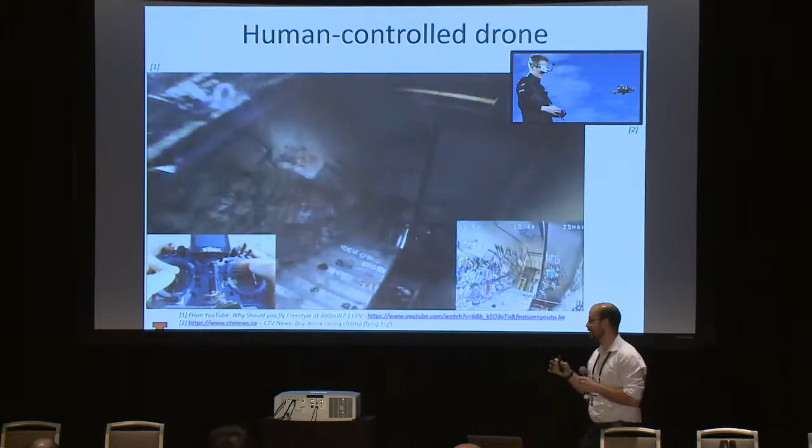In fact, humans are really good at controlling machines. This is a drone being teleoperated by a human, and you can see he's able to fly in this very complex scenario doing very dynamic maneuvers, probably at a bandwidth he's not even aware of. So the practice of the operator also plays a huge role in how well the system can be controlled.

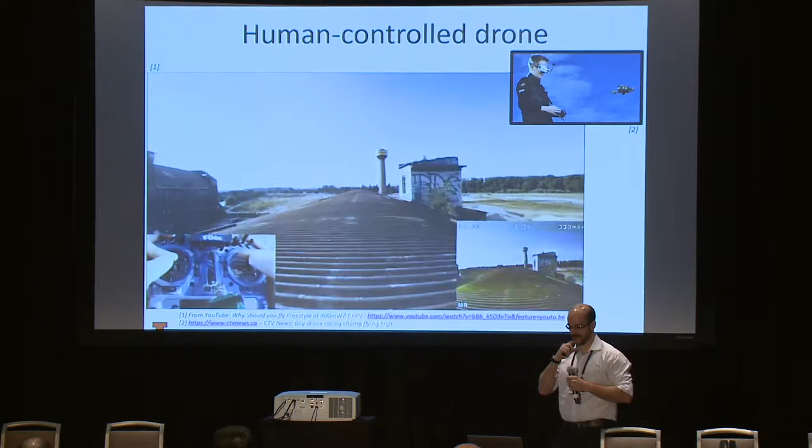Actually, this is one of my favorite parts. It's crazy what humans can do when they actually get to practice with the system.

So why don't we do the same thing with, for example, sending a robotic disaster responder? Well, there's a fundamental difference between flying a drone around and actually interacting with the environment. Let me give you an example.

Let's say you're a firefighter and you want to break down this door using an axe. You're not just going to swing your arms and hit it. The strategy involves your whole body, which plays a huge role in the force you're applying, but also the feedback from the environment. The feedback you get from doing this task is very important to do it right. If the door opens or if the door is locked, your reaction is going to be different.

And this isn't something only firefighters can do - everybody does this all the time. Take this little girl, for example, trying to open a door that's too heavy for her. What she does is actually go into this unstable condition and lean against the door so she can amplify the force she's able to exert and actually open the door and move through.

So I think there's something we're missing here when you try to do whole body teleoperation strategies. Let me try to convince you of my way of thinking about it.

I think it should begin the same way: we get a human operator being controlled by this sort of black box controller that we don't exactly know how it works, and you command the robot to move and exert some force on the environment. The environment responds to the robot with forces and other feedback, and something I think we're missing at the whole body level is: how do you close the gap? How do you give the human the feedback needed to really leverage human motor intelligence to control a robot that physically interacts with an environment?

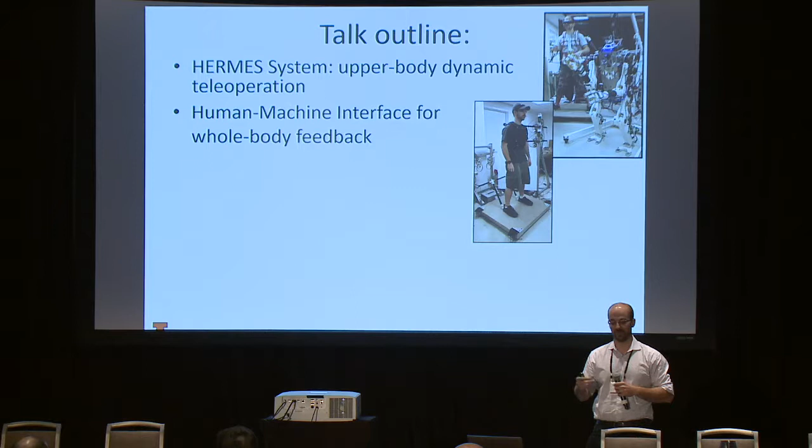I'm going to present the bilateral feedback strategy we developed for synchronizing locomotion, and how to control two systems using that - one a simplified cart pole, and the other the actual robot itself.

So let's get into the first one. Let's talk a little bit about the HERMES system.

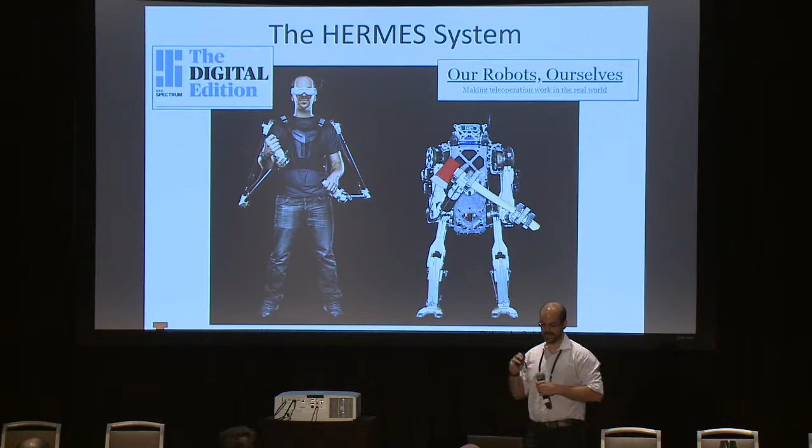So the HERMES system, it's a system that we developed back in 2014. And just now we managed to get this really cool picture from IEEE. They just released the article super late now about it, but it's still relevant. I still think that we did some really interesting things back then.

So in order to map the motion from human to robot, we did the simplest idea, right? So we did the very simple Cartesian mapping. The human Cartesian position of the arm would be mapped to the robot scaled by the arm length, and also the position of the body of the operator would be mapped to the robot to copy its posture, right? And you can see that the human operator will also wear that whole body feedback suit that later on I'm going to explain how it plays a role into the whole thing.

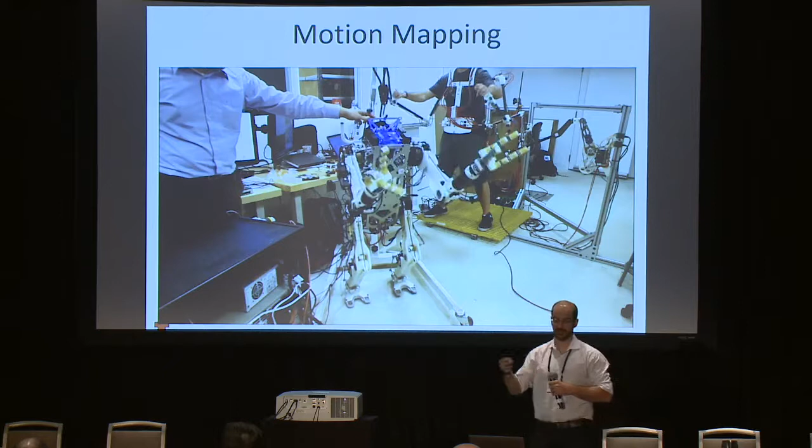And what is nice is that because it's a teleoperated system, there's a lot of stuff you get for free, right? So human dexterity, if you do it right, you can achieve these very interesting behaviors, which for an autonomous robot is incredibly difficult to do.

But also, we try to do some more interesting things. So we also use a robot to put out this mock-up fire just to sort of illustrate the potential of what we're trying to achieve. This was actually a demo that we did for a Robotics for Good video. But yeah, so it was just for shows.

But the robot itself, we never designed HERMES to work in this semi-static regime. So what we try to do is actually go into more dynamic situations. Probably some of you are familiar with this video. We try to actually teleoperate the robot, for example, to break through the drywall. And we're just trying to demonstrate that you also have to design your robot system correctly such that it's able to absorb these impacts and also produce large forces using whole body coordination, right?

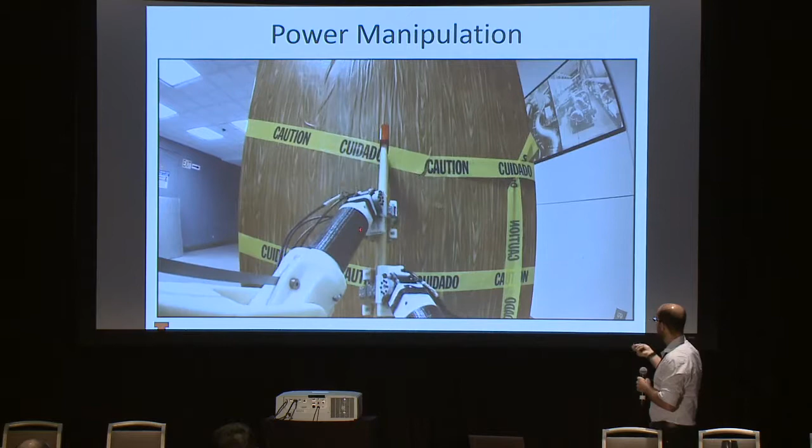So we learned that actually if you make the robot lean against a strike and just halfway through hit it, it would actually be way more effective. Because first we're just trying to blindly swing the arms and the robot would just be torqued back, right? And because you have the teleoperator there, we can just try all these things on the fly.

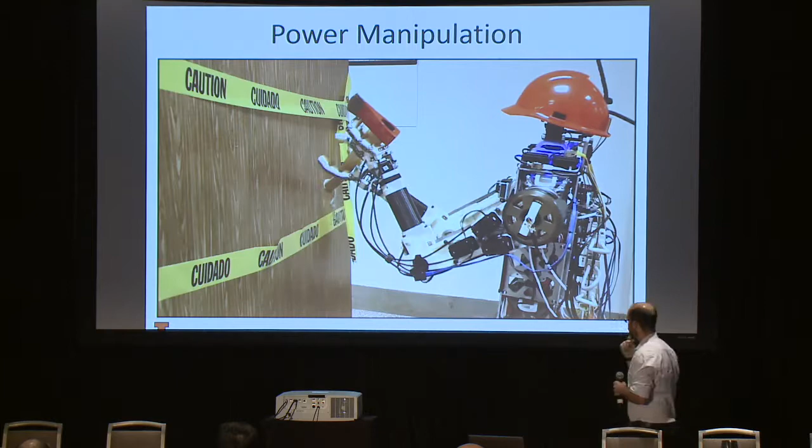Okay, so this is how we mapped human motion to the robot. So how did you close the feedback? Honestly, at the beginning, we had no idea how to do this. We didn't know exactly what sort of forces would be appropriate for the human to experience while the robot is doing its own activities.

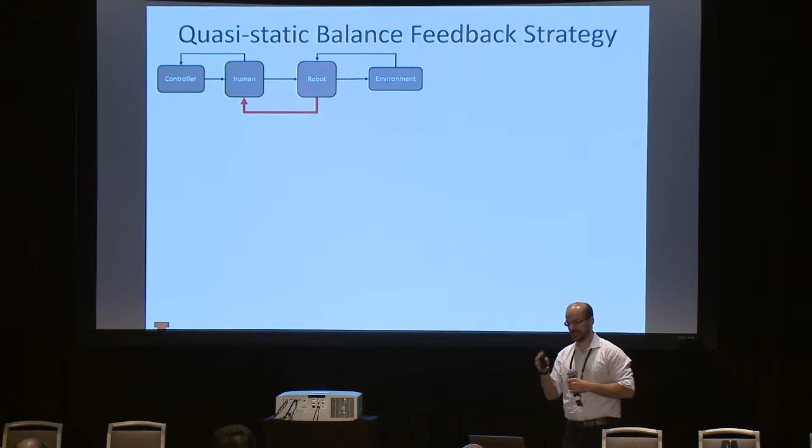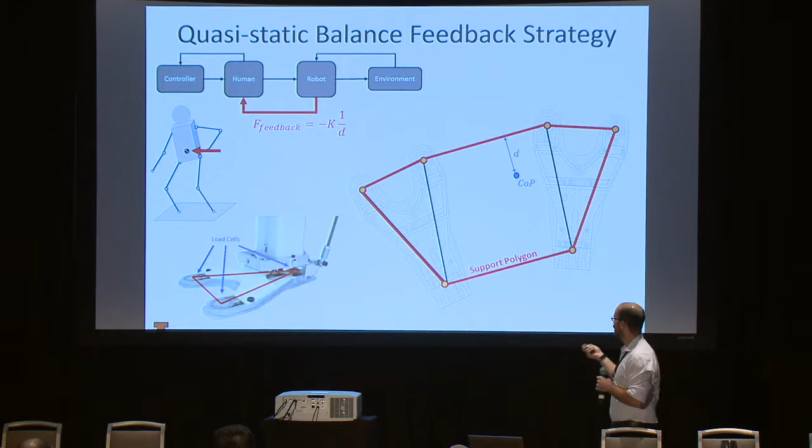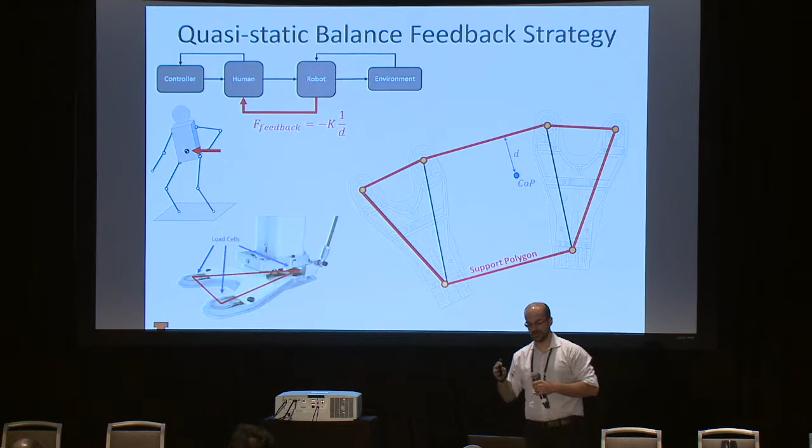So the first thing that we tried was very basic, was a quasi-static notion of stability. So we took the load cells on the robot, and if you project the support polygon, there's a point on the ground that's called the COP, right? I think most of you are familiar with this. So the first thing that we try is, okay, let's apply a force to the operator that is the inverse of that distance. The closest the COP is from the edge of support, the harder the force that you apply back, right? And I know this is a very naive approach, but it was the first idea, let's try to get a sense of what we can do with this.

And we got some interesting results. So for the robot, if the robot's standing there and the person is trying to maintain a posture, if the robot gets hit, then you can feel that. If the robot is trying to work with this sort of payload, then the operator can kind of come up with a different posture in order to regain balance of the robot. So this was all very interesting behaviors, but it was very basic, right?

It was definitely not a complete story. And there's something else that you need to do if you want to really go into a more interesting regime for these machines.

Okay, so we learned a lot of stuff. We learned how to teleoperate very fast motions, how to do large feedback forces, which is very complicated if you're trying to make a very transparent system, and also how to design these humanoid machines such that they could take these impacts to the environment and be robust enough to do that.

But if you're a humanoid and you're not attached to the world, then if you want to apply large forces to the environment, you also need to balance and regulate foot placement, right? So the feedback applied to the person needs to take into account some sort of locomotion dynamics as well.

So my research is about that. How do you build up all the strategies in order, for example, to come up with more interesting behaviors, such as taking steps, building up momentum, and then hitting the wall with the firefighter axe, which is sort of what we see the little girl doing.

She was sort of losing stability for a second in order to amplify the forces she was able to apply. And that's the sort of behavior I want to explore. I don't want to restrain the robot to be in a safe condition. I wanted to have an experienced operator be able to really understand how to control this machine and these added dynamics. Okay, but how do we do this?

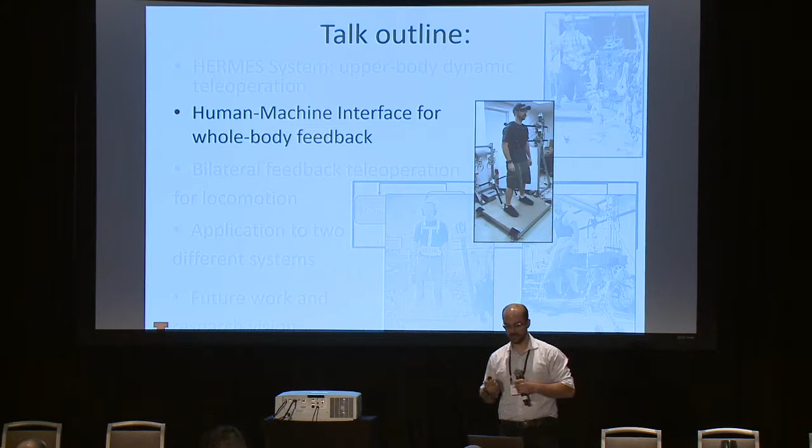So let me talk a little bit about the human-machine interface that we developed in the lab. This is called the BFI, the Balance Feedback Interface. It's an old name, we don't go by that anymore, but this is sort of the idea.

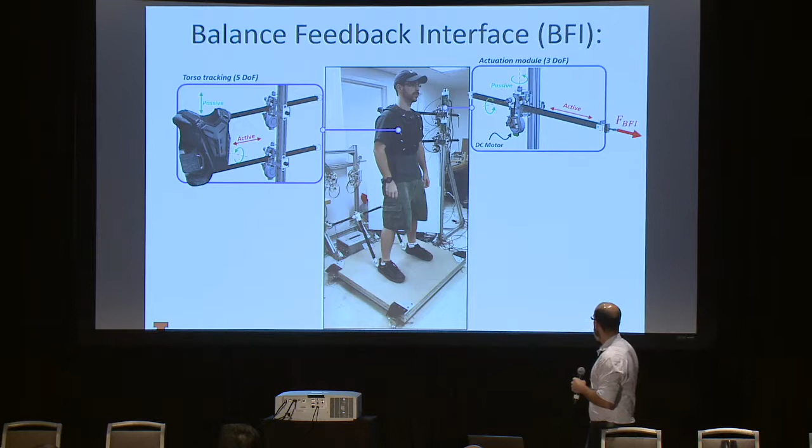The person wears this vest that is attached to a fixed frame using push and pull rods. These rods can apply a force on that line, so by modulating the force on the two rods, you can modulate the forces that the person feels, some sort of moment or linear force.

We track the foot position using this passive linkage system. We did this because we can really push the sampling rate of the system, getting something on the order of 10 kilohertz of sampling rate of the human position. We have a real-time computer that measures the whole thing.

And also the person is standing on this 6-axis force plate, which is going to be very important to understand the forces that a person is applying on the ground as he or she moves.

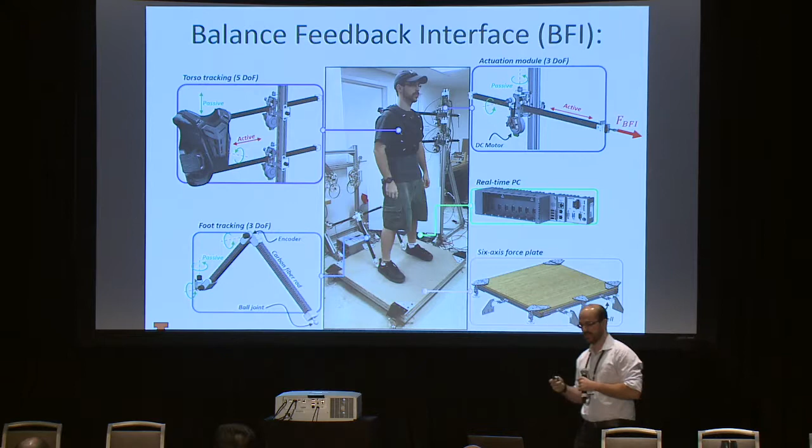But locomotion is a very complicated thing, I think all of us know that at this point. So let me show you how we break this down. This is a very basic motion: you have the operator here stepping side to side.

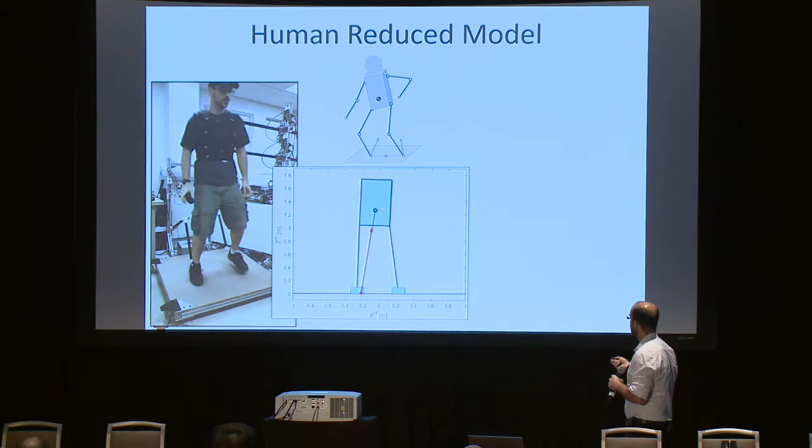What we do is just care about the core components of that locomotion. So if you take the position of the torso, which I assume to be the center of mass, position of the feet, and also position of the center of pressure and ground reaction forces, this is the kind of motion decomposition you get. That's actually the essence of locomotion: what is the interplay between your COP and the center of mass.

So that's what I want to transfer to the robot. I don't care what the rest of the system is doing. But in order to do this, my first approach is to start slow.

Let's try to reduce that to what most of you know as an inverted pendulum. If you isolate the center of mass and the COP, you get a system that looks like a pendulum, a very popular system called the linear inverted pendulum, which is incredibly powerful. You would be surprised. This is very important to understand the strategy behind what I'm trying to do.

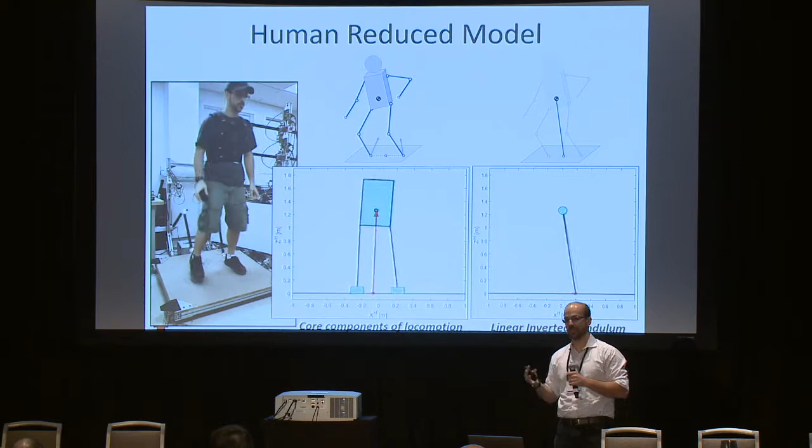So let me talk a little bit about the bilateral feedback strategy that I developed. This is the pendulum, the linear inverted pendulum equations. If you consider the height to be approximately constant, the natural frequency of the pendulum is sort of fixed, and you can write down an equation of motion.

It's something very simple—I think all of you are tired of hearing this. But what is interesting is that if you do the mode decomposition, you get a system that's first order that looks like that. And you got two states, actually.

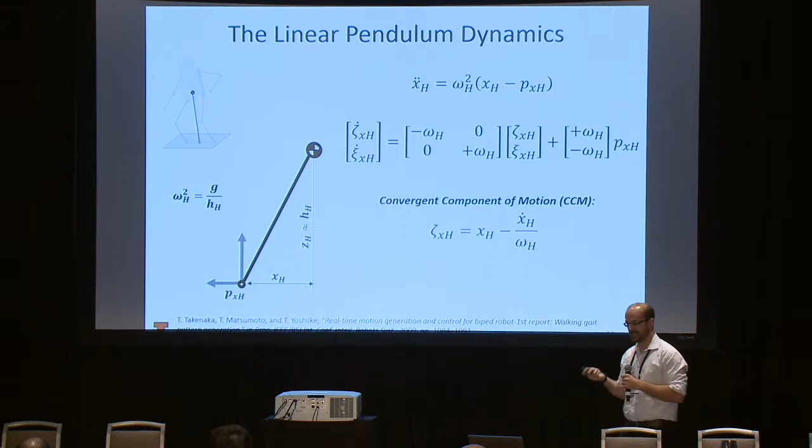One of them is a state associated with the stable pole. The stable pole, which is called the convergent component motion, looks like this—an augmented central mass state. The second one is a state associated with the unstable component of the system, called the divergent component motion, or capture point, or extrapolated central mass, among other names.

So the idea is that we assume the human is trying to control this unstable component, using the ground reaction force in order to do that. So if the robot follows what the human is doing with the unstable component, and follows a scaled version of the inputs, then they should move in a similar way.

So that's what I tried to do. And the DCM is just a projection forward of what the central mass is doing. So this is the key of what I'm doing—this is a very basic principle of what I'm trying to do.

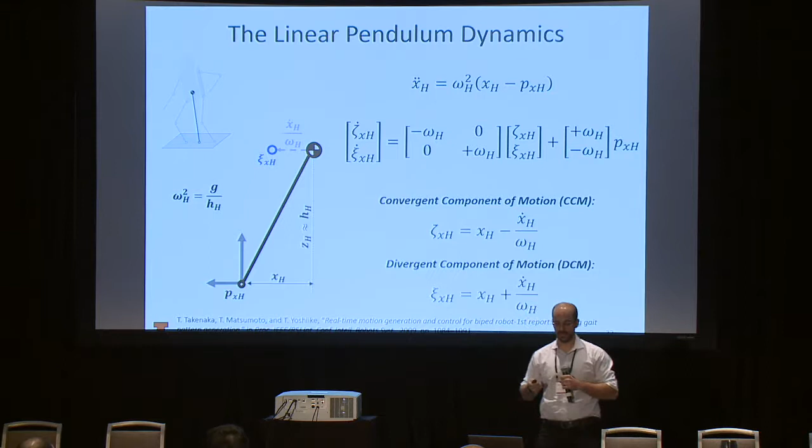So what we want is, if you have the human operator and the robot, both systems to follow a kinematically similar DCM trajectory. So if the human is able to stabilize its own DCM, the robot is going to do the same thing. And in order to achieve that, I'm going to use feedback to guarantee that the time rate of change of the DCM is the same, normalized by the natural frequency, because the pendulum relies a lot on its dynamics.

An interesting thing is that if you take this equation and plug in the equation of motion of the entire system, you get two terms. The first term says how you scale the human forces such that the robot applies them and can reproduce that DCM trajectory. The second term is what forces you should apply to the operator in order to make sure this is guaranteed at all times.

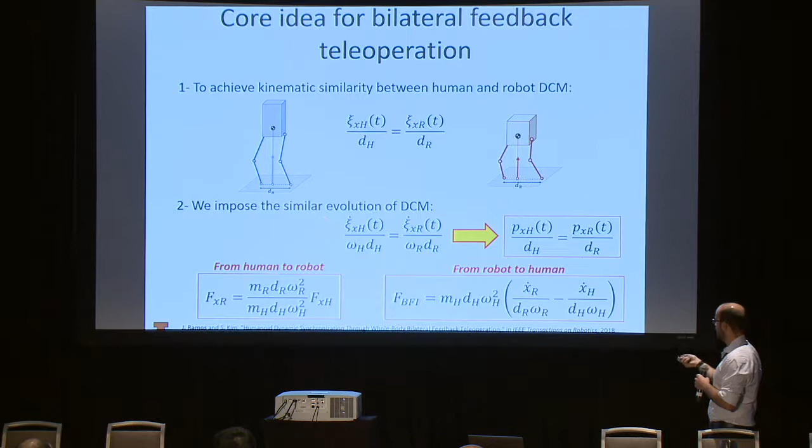So what I'm doing is actually using feedback in order to synchronize two systems that have different natural frequencies. The idea is very, very simple. And what is nice is you can show that if you have this, the two systems actually show the same relative position of the center of pressure, which is important because you want to be taking steps together. So the two systems become synchronized.

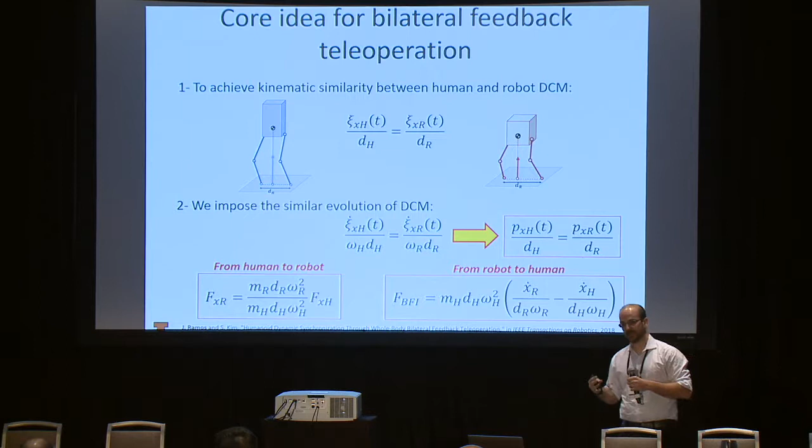So in order to demonstrate what I'm trying to do, I actually built the simplest system you can think of, which is the pendulum itself. So let me show you how to apply this to that simplified system.

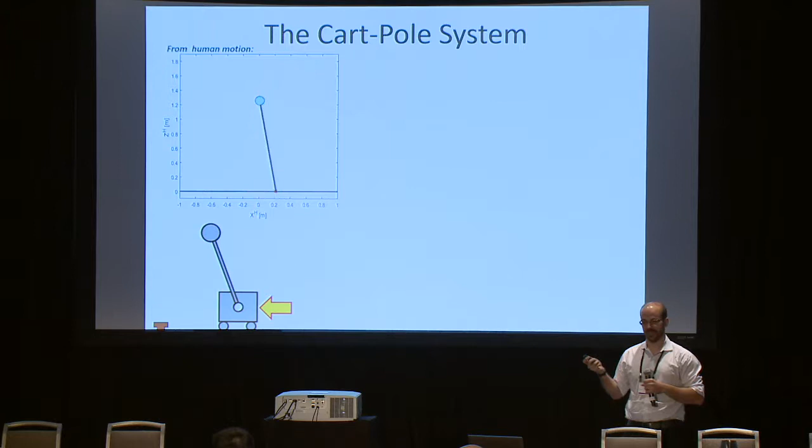So if you remember, the human motion when it takes steps looks a little bit like that—this is the central mass, that's the center of pressure. For those of you with a more controls-oriented background, this looks a lot like the cart-pole system. The cart-pole system is pretty much an inverted pendulum with a passive hinge on a rail, and the only thing you can do is place the position of this cart here, and in that way you balance the pendulum.

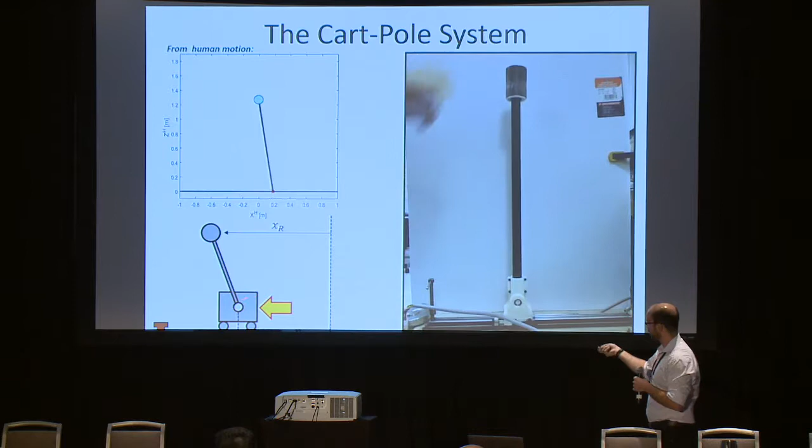So it's very similar to what I'm interpreting the human is trying to do when the person walks around and tries to manipulate the central mass. You can't see it here, but if you assume the position of the cart is equivalent to the position of the center of pressure, and the position of the mass is equivalent to the position of the human center of mass, the systems are very, very similar.

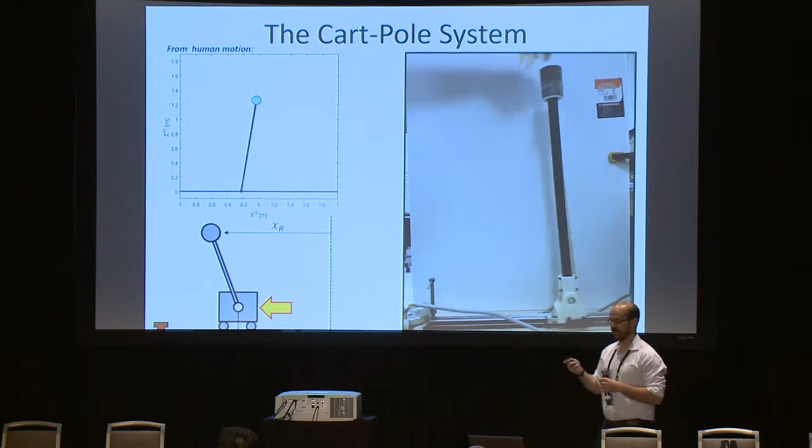So we can actually teleoperate this—this is a very simplified teleoperation scheme that I tried to do. You have the human operator, and as you move, you produce some sort of center of mass, DCM, and center of pressure trajectory. We scale that to a scale that makes sense for the robot to follow, according to the robot's dimensions, and then plug that in as a reference for some controller of the robot to follow.

So in this case, I just use a simple LQR, but this can be your favorite controller, whatever controller you want, it can be anything of this sort. A key thing here is the feedback force is actually going to compare the normalized velocity difference between the two and create a feedback force that's proportional to that velocity.

So pretty much if the pendulum is falling faster, the human machine interface is going to push you faster. If the pendulum is lagging behind, the human machine interface is going to create drag and try to slow you down. So you try to really synchronize the two systems.

So what happens when you put that on the real system, this is the kind of behavior that you get. What I want you to look at is the position of the center of mass, kind of equivalent to the position of the pendulum mass, and the COP also matches the position of the cart. So as you go in double support, the base of the cart moves side to side, and it copies what's happening. And this is happening despite the fact that this pendulum is about half human height.

So what's interesting is that the person is teleoperating in real time a system that has different dynamics. The person is able to generate these trajectories in real time despite the fact that the two systems have different dynamics. This is done because there's a feedback force applied to the person, and you can see that later on when someone pokes the pendulum.

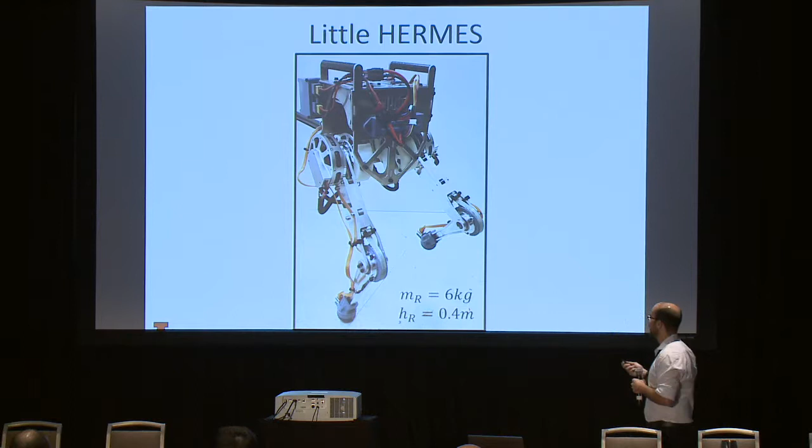The first one is that it uses what we call proprioceptive actuators, which is a whole other topic, but it's the same actuator that you guys see on, for example, the Mini Cheetah, if you're familiar with this. The legs are very lightweight. The transmission is as efficient as I can make it.

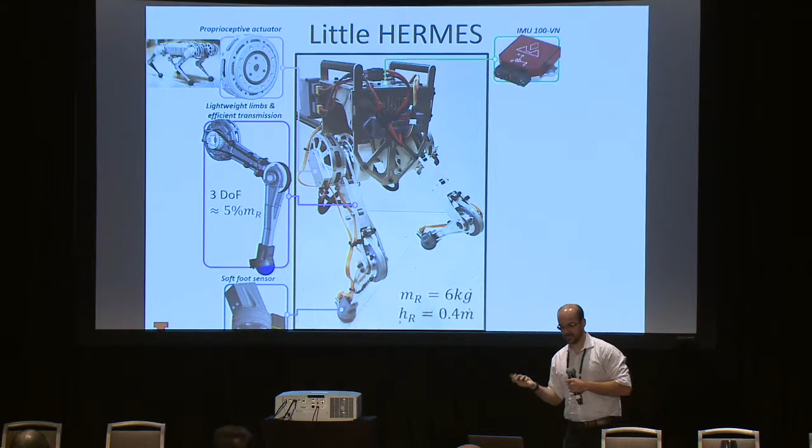The feet have this force sensor that I just use as a contact switch, so the robot knows if it's touching the ground or not. But I do not use a force sensor for force control. Force control is all done by the motor current and kinematics. The robot has an IMU, real-time computer, LiPo battery, and this lightweight frame that encases everything.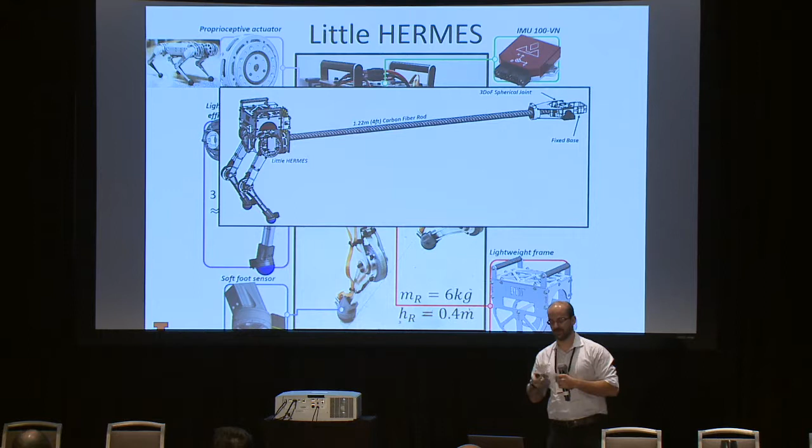And unless I mention later on, all the experiments I'm going to show, the robot is going to be attached to a boom. So what I care about is the robot's frontal plane. The robot cannot fall back and forwards. And I just want to point out that the robot is actually very, very small. Right? So that's what is interesting.

So let me show some of the primitives that the robot must have in order to accomplish what I'm trying to do.

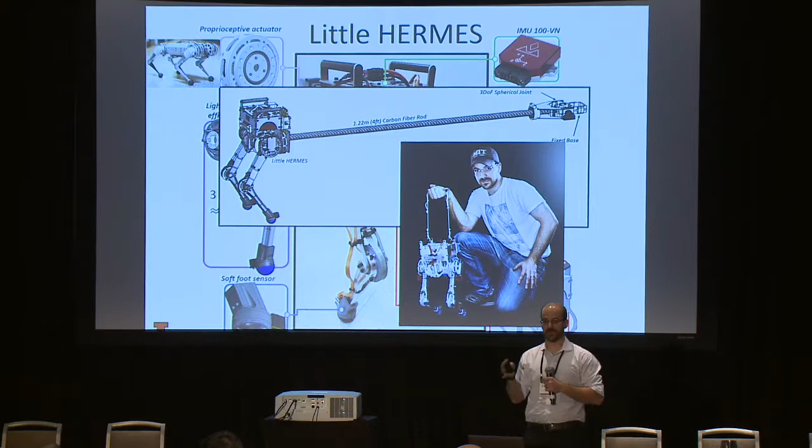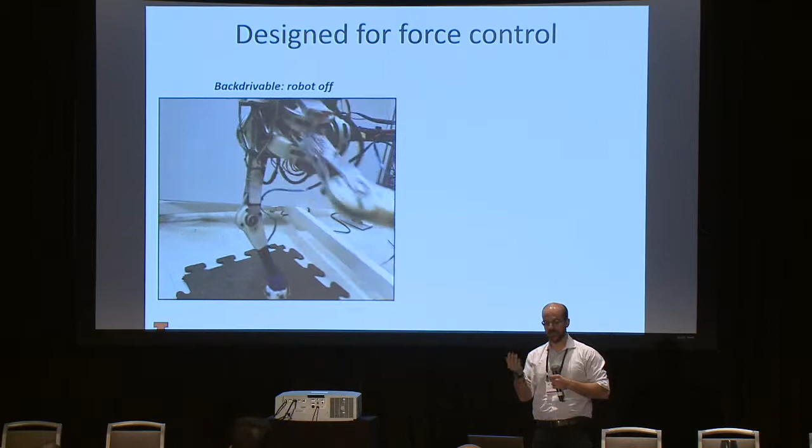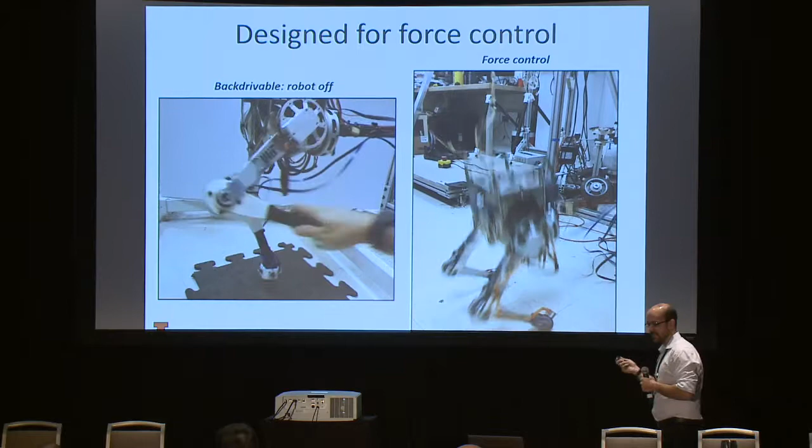So the robot is highly backdrivable. This is with the robot off. We want that because the robot needs to be able to experience impacts, and we also need a high efficiency transmission in order to control torque at high bandwidth. Because it's so backdrivable, it can control force pretty well. So if you tell the robot to jump, it can produce very compliant behaviors, without any sort of spring or force sensors anywhere. This is the base behavior that we require.

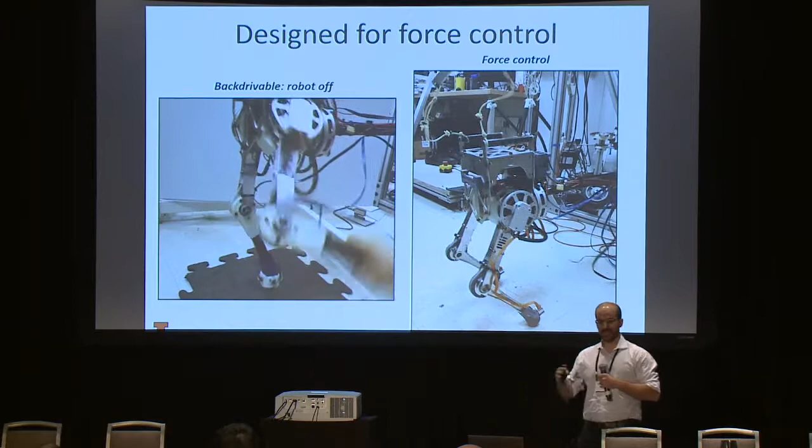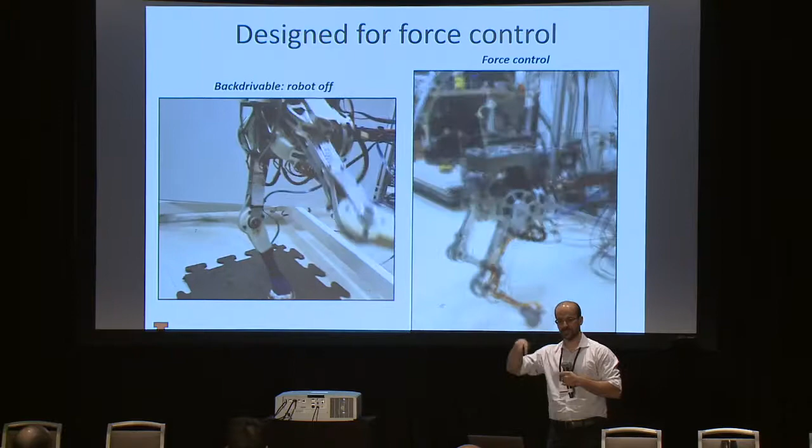But the robot's not a pendulum, right? So it needs some sort of intelligence in order to translate the pendulum reference to actual leg forces and feet trajectories. So this is what the basic behaviors are.

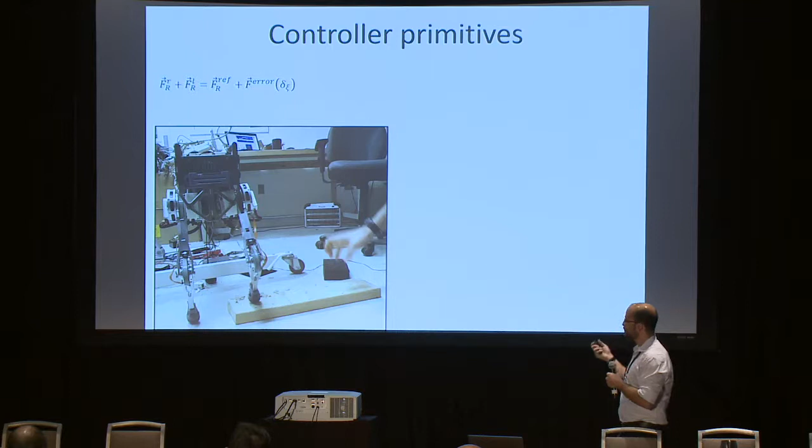When the robot's standing, it calculates the right and left ground reaction forces such that the net force applied to the center of mass is the summation of the component scaled from human motion—the human reference—plus a force that tries to account for the error in the DCM. So given the current position, it does a force distribution in order to stay at a certain position with the DCM. In this case, there's no operator; the robot is just trying to maintain the DCM in between the two feet.

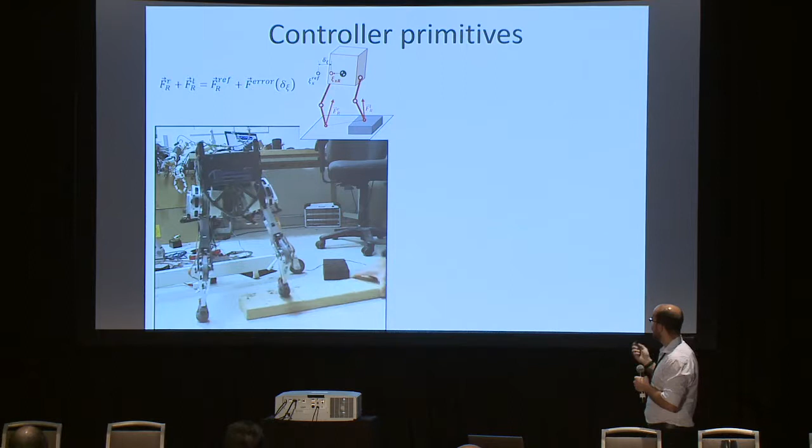The second motion controller primitive that the robot has is trying to control the feet. Whenever the person goes into single support, the robot tries to track the operator's foot. In this case, there's no operator, so the robot is just trying to stay at a certain span, but it knows how to place its feet following a reference. In this case, the reference is just staying in pose.

So these are the two basic controller primitives that we need in order to apply the strategy that I'm trying to use right now. So let's go to it.

The first thing we do is capture the human motion—the human moving around, the ground reaction force, position of center of mass, and all that. We condense that information to the linear inverted pendulum, and we want the robot to follow that reference. So we scale the linear inverted pendulum motion to the robot size.

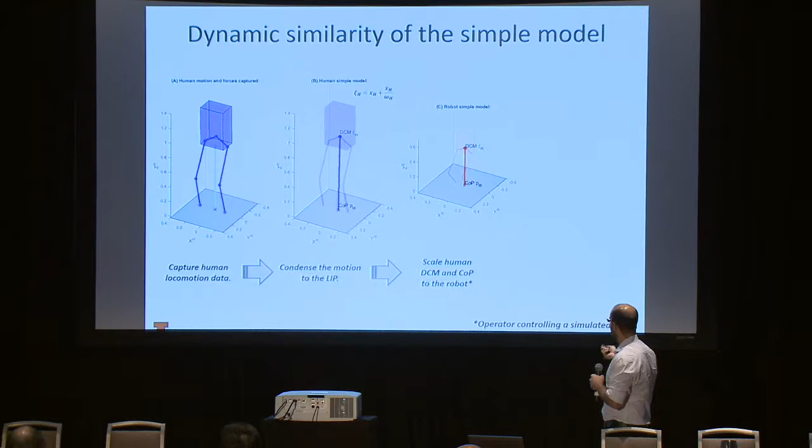Then we take that reference, and the robot calculates what should be the ground reaction forces in order to reproduce that. Because locomotion is such a complicated system, what I want is for the two simplified models to be dynamically similar. And if they are dynamically similar, the human can control these dynamic trajectories in real time.

In order to make sure these two systems are dynamically similar, what I use is feedback. Every time the person moves around, there's a force feedback applied to the operator, and the force looks like that, just to make sure the two systems are synchronized. So to represent what that means: if the robot is just standing there and gets hit, there's a jolt of force applied to the person that's proportional to the difference in velocities.

An interesting thing you can do with this is that if the two systems are synchronized, you can now take simultaneous steps. In this case, the human is teleoperating the robot to take a step at the same time. This is what I think is actually powerful about this approach.

In this top plot, that's the human DCM in blue and the robot DCM in red. It's noisy because the foot I use is a little springy, so every time it steps it shakes a little—I'm trying to get rid of that. But the interesting part is that the COP of the two systems is actually completely synchronized. The beauty of this is that now you can really control the robot to take steps together with you at the point that you want with a certain dynamic.

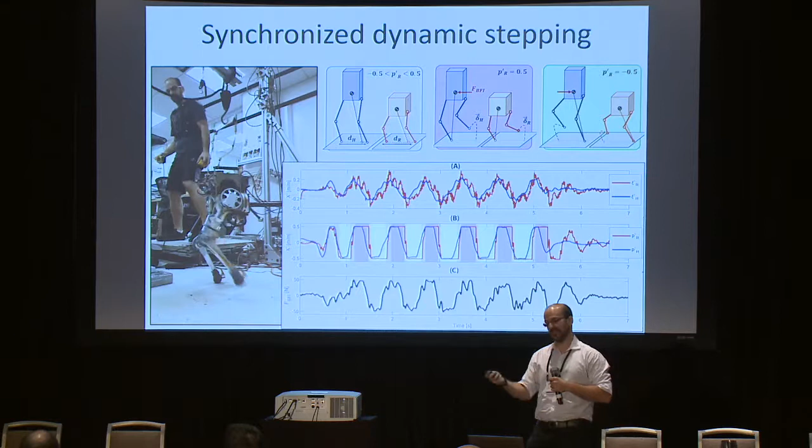So this is what's interesting about this whole approach. Because you have a human there, you're not just limited by that. If you have a certain experience with the system, you can start doing more interesting things.

So I showed you how to do synchronized steps, but you can also go into more dynamic jumps. If you modulate the ground reaction force and scale that to what the robot should be applying, the human can control the robot to do these sorts of jumps as well, which I think is very interesting.

And the last thing is, the robot doesn't need to be limited by what the human is experiencing. If you have the right amount of autonomy, and I think being autonomous is a very powerful thing, it can collaborate—you can control the robot to deal with objects the operator isn't looking at. If the robot can deal with an obstacle and still make sure that the linear inverted pendulum, for example, is dynamically similar to what the operator is doing, then the teleoperation is still the same, as long as the robot has this sort of embedded intelligence.

So I think that at some point down the line, what I want to do is give a little more intelligence to the robot, but follow the baseline trajectory of what the human is trying to accomplish.

Okay, so after I did all this, I wanted to show how we could extend this for some sort of locomotion behavior. So the last thing I did was this: if you have the human operator stepping in place and, for example, leaning against some sort of string, you can measure these ground reaction forces and tell the robot to apply a scaled version of that. And if the robot does that while taking steps in place, it starts walking.

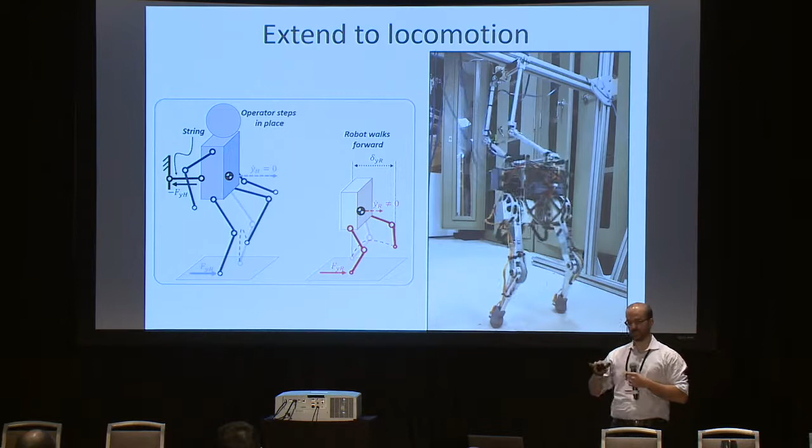So this is a very basic behavior—I just wanted to show that this sort of strategy has the potential to control locomotion too. The operator can step in place and then turn, step in place and jump, and you can start to get into much more complicated behaviors with this strategy. This is what I want to explore further. I think a person being able to learn how to cope with this added dynamic is a very powerful strategy. Okay, so I did all these things.

Let me just give you some words on my future work and research vision. So where do you go from here? I think there's a lot to be done. I think improving autonomous controllers on the robot has huge potential.

I think a lot of people ask me about learning. Sure, the robot can learn how to move better from human input, but I think human practice plays a huge role. What I want is a specialist to control this robot, and I want to shoot for performance instead of trying to get to something that anybody can use.

But also, how can you make the human-machine interface more immersive? Just giving the right tools to the operator, not trying literally to transfer the human body to the robot. And finally, how can the robot anticipate? Sometimes if you want to do some very fast stepping, how can the robot anticipate where the human wants to step and place its foot?

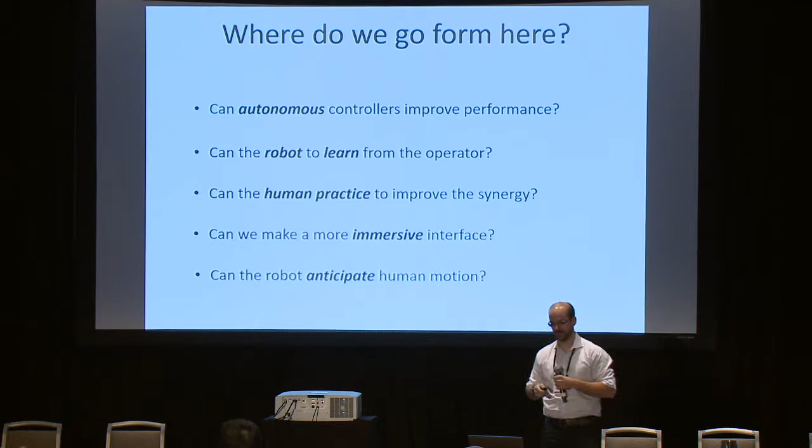So my next steps are to actually combine everything I did with HERMES—this whole body manipulation—with the locomotion I started to develop with Little HERMES, and really look into tasks that involve whole body coordination. Tasks that are highly dynamic, involving balancing and foot placement, but importantly, how do you create large forces given that you have a high center of mass and need to control your feet, and design machines that can deal with impact. So these are all the things I care about.

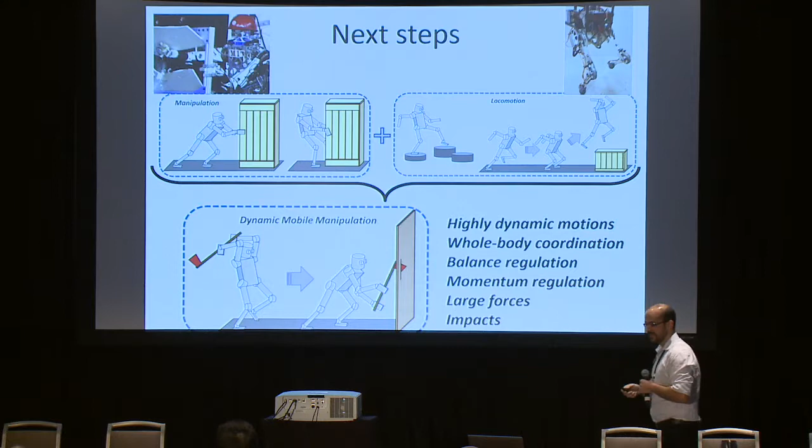And the last thing I want to say—you can't see it here, but there's a quote from my great masters: the greatest teacher is failure. I'm going to leave you with some of my failures, because it's an incredibly complicated task to do. And I'll take any questions if you have any. Thank you.